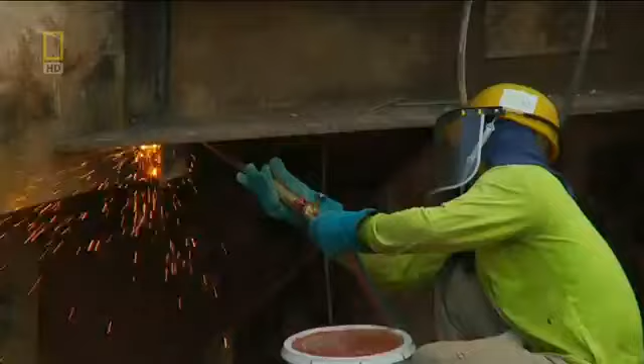Singapore's Marina Bay Sands is one of the world's most complicated construction projects. Engineers have to build not one, but three skyscrapers that will shoulder a sky park as big as an aircraft carrier. Worst case scenario, we get stuck.

They have to devise ingenious solutions to assemble a 60-meter tall museum of impractical dimensions, install giant artworks, and erect seemingly floating pavilions for shopping and entertainment. If engineers succeed, they will create a virtual city unto itself.

Singapore, the Southeast Asian country, is smaller than New York City. The lack of space forces it to build its largest leisure and entertainment hub to date on a small tract of reclaimed waterfront land.

The Marina Bay Sands. It's not one megastructure, but many. Serious challenges lie in the array of buildings that form the unique complex. Three 55-story hotel towers slope at such great angles, they're in danger of buckling under their own weight.

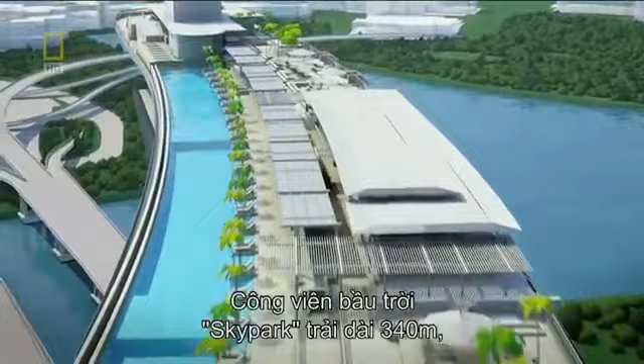An even bigger problem is the hotel's roof. A 340-meter sky park spans its length, containing gardens, outdoor pools, and the world's largest cantilevered observation deck. But how do you build something as big as an aircraft carrier, 200 meters in the air?

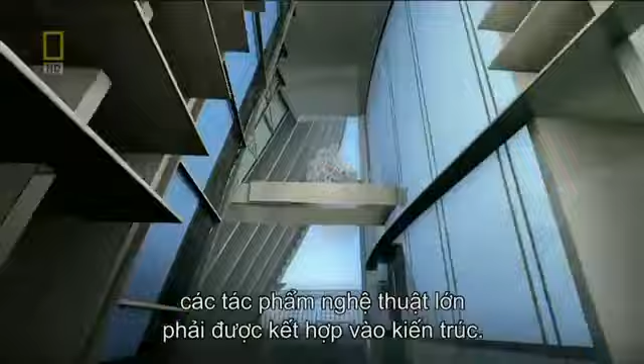In the hotel's atrium, mammoth works of art have to be somehow incorporated into the architecture. Its challenging centerpiece, a 15-ton mass of steel by a renegade artist from Britain.

A 60-meter tall art science museum is designed for maximum visual impact. It will be to Singapore what the Opera House is to Sydney. Only one problem: it seems too impractical to construct.

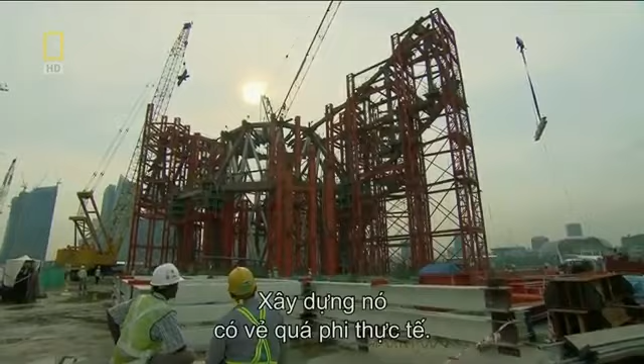And a set of dramatic glass-encased pavilions, while themselves posing little challenge, have to be built in water.

The man behind the Marina Bay project understands the risks, but he believes that anything short of astounding will fail. Sheldon Adelson, one of the world's richest men and CEO of Las Vegas Sands Corporation.

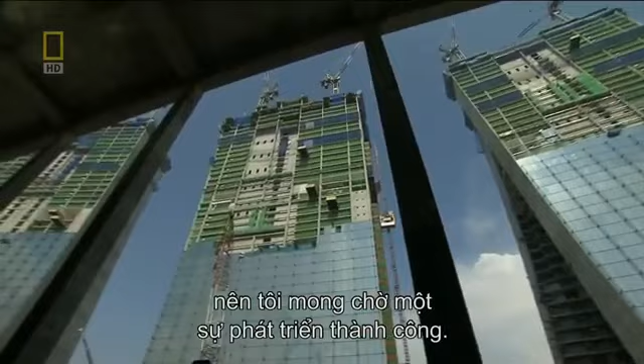What we hope to accomplish is to change the face of Singapore tourism. So we expect a very successful development. That is by far the largest and most expensive single project we've ever undertaken. It'll cost about 5 to 5.5 billion US dollars. It's a lot of money. Now, I know $1 billion doesn't buy what it used to, but by any measurement, it's a lot of money today.

Adelson believes his huge investment is safe in the hands of Moshe Safdie, a world-renowned architect. Safdie is recognized for his use of dramatic curves and geometric patterns. The Marina Bay complex will be his largest and most difficult project yet.

I think that architecture has to be timeless. Therefore, what it espouses, what it provides, needs to be something that has a long life. What's unique about Marina Bay is all the pieces coming together. You can't think about it as individual buildings. You've got to think about it as a piece of city. It's much more a symphony than it is a sonata.

On the ground, engineers are more concerned about the reality of building Safdie's vision. This is the North Retail section area. 30-year veteran John Downs is in charge of overseeing the entire project. The design is very, very diverse, and each component of the project is totally different from the others.

For a project of this size, you'd expect with the planning, with the design, with the construction, you'd be expecting somewhere between 6 to 7 years. Here is basically a 3-year turnaround.

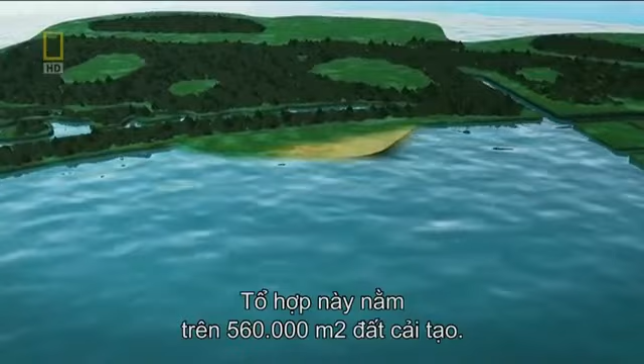The complex sits on 560,000 square meters of reclaimed land, part of a decade-long plan to revamp Marina Bay, a former saltwater estuary that's now a freshwater reservoir.

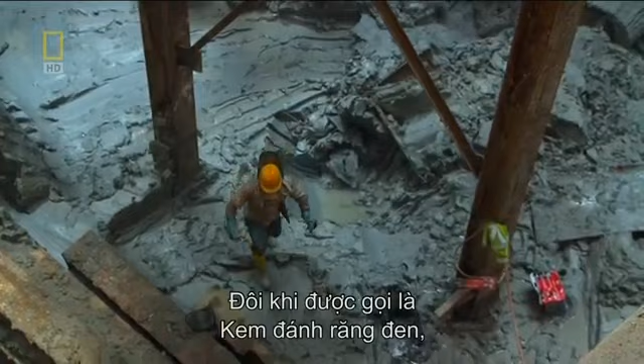Beneath the reclaimed land, which is essentially a seabed, is a dangerous layer of marine clay. Sometimes called black toothpaste, marine clay has very poor structural properties. If not given complete respect, the unstable marine clay is potentially fatal.

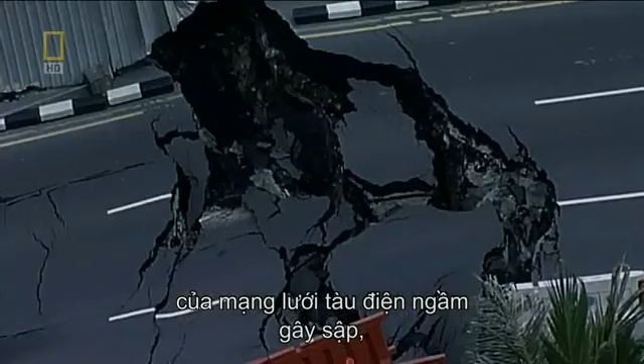In 2004, Singaporeans discovered the lethal consequences firsthand. A routine excavation in an underground tunnel for the mass rapid transit network causes a collapse, creating a gaping hole in the Nicoll Highway, killing 4 workers.

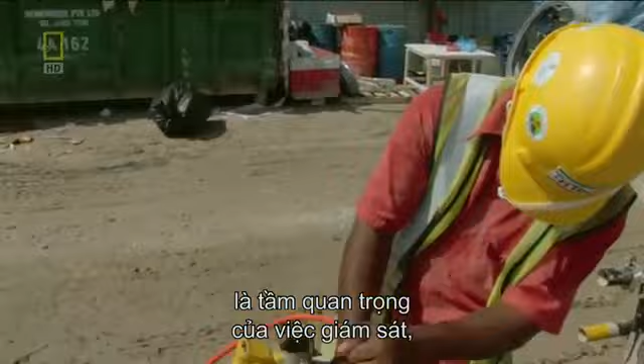The ground conditions in which they were building the Nicoll Highway were not dissimilar to those in which we are encountering here. They had also soft clay, they had similar depths of excavation between 20 and 37 meters. One of the big things that was learnt in the Nicoll Highway collapse was the importance of monitoring movements and the control of quality as the construction proceeds.

Marine clay is an old foe of engineer Mike Barton. He's defeated it in the past by understanding how it behaves. The big problem with marine clay is that it is so soft that when you dig out the inside, the walls will move and potentially collapse and allow all the surrounding water in the bay into the excavation.

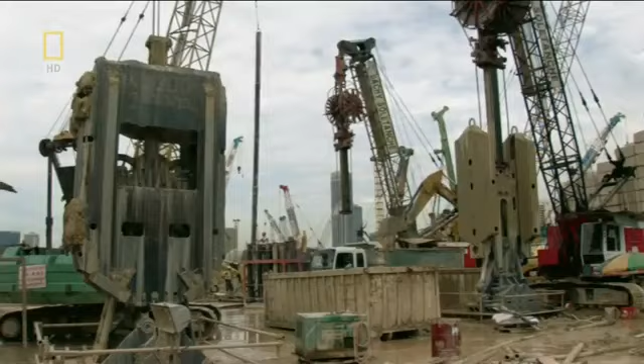So, before work can begin, the unstable building site needs major fortification.

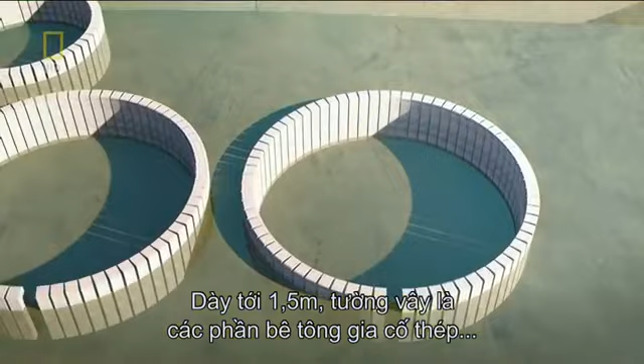To combat marine clay, engineers decide to build giant concrete walls to create stabilizing perimeters for the larger buildings, known as diaphragm walls. Up to 1.5 meters thick, diaphragm walls are steel-reinforced concrete sections, pounded 50 meters into the ground. They form watertight enclosures for men and machines to work round the clock.

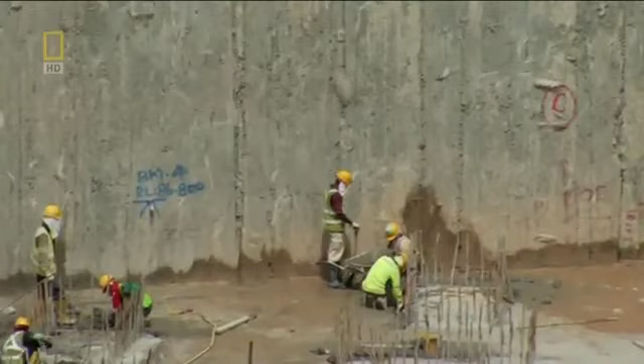In just 1 year, over 4,000 meters of diaphragm walls help produce a rock-solid foundation. The diaphragm walls were constructed in a formation we called a peanut formation, which is 2 circles joined together, and a donut formation, which is circular. They're able to withstand very, very large forces from the marine clay without any movement. They encapsulate an area bigger than a football pitch that enables us to excavate very quickly and to build structure up very quickly.

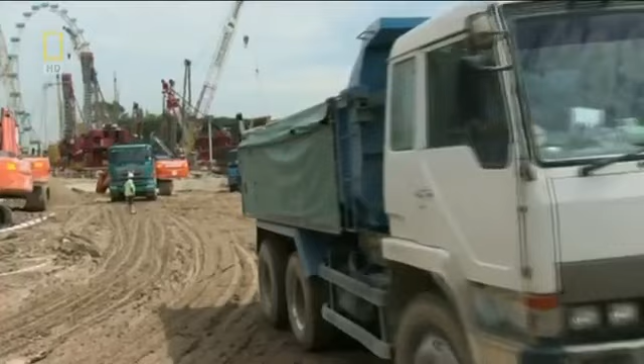Securing the footprint of the Marina Bay project has already taken a year out of John Downes' schedule. He now faces the difficult task of erecting the resort's many buildings in a space of just 2 years. Just managing the whole logistics of that, including the construction methodology, is very, very challenging for us.

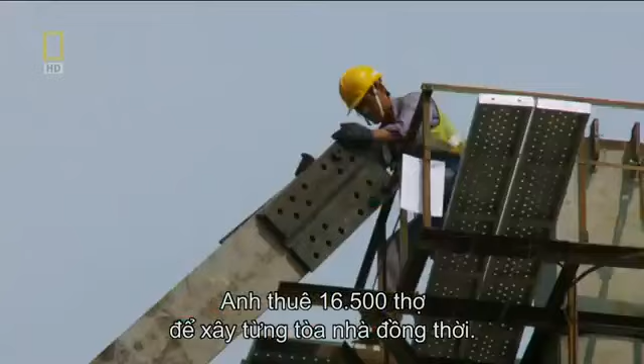To meet his tight deadline, Downes chooses the most direct solution. He hires 16,500 workers to construct every single building simultaneously. It's like leading a small army, so organizational excellence is key.

We're just on the edge of Singapore in the CBD here. Rather than lose the contractors and the workforce to go off-site, we built our own 3-story project office. We have all of our contractors, our subcontractors here. We house our resident site staff. We have our project management team, our construction management team, our design management team, and the logistics here.

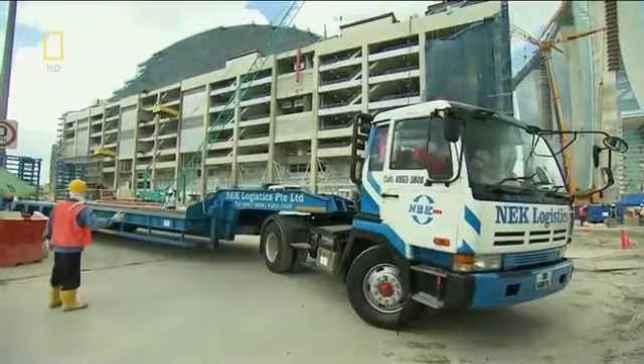The tight schedule also creates problems at the hotel towers, where engineers are already struggling with a congested site. The important thing to do is to make sure that they come in and deliver the goods straight away and then get out again. We don't want too many vehicles on site at the same time.

To speed up construction and alleviate traffic congestion, engineers turn to a method that's proven itself countless times in the field: precast concrete.

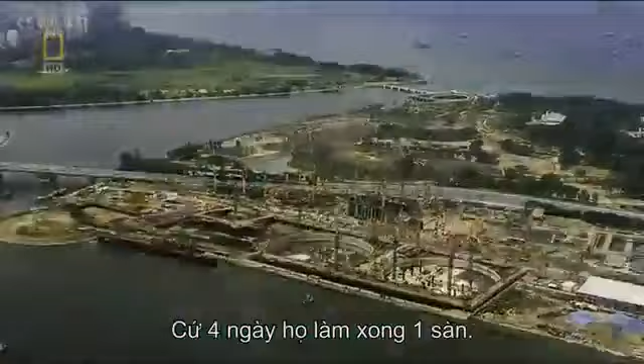Hotel walls are made on site in the thousands. And workers laying the floors are so proficient, they produce 1 floor per 4-day cycle. It's an impressive display for a conventional solution.

But the structure they're attempting is anything but conventional. The key challenge of building the hotel towers is its unusual design. Unlike other skyscrapers, part of the towers slope at incredible inclines. Like a set of collapsing dominoes, the towers could buckle under their own weight if a practical building solution is not found.

It's a major concern for engineer Craig Glover. I've been in the industry for 25 years, done a wide range of projects in many different countries, but nothing compares to this whatsoever. There was nothing we could take reference from across the street on the next high-rise or across town. This is a new frontier.

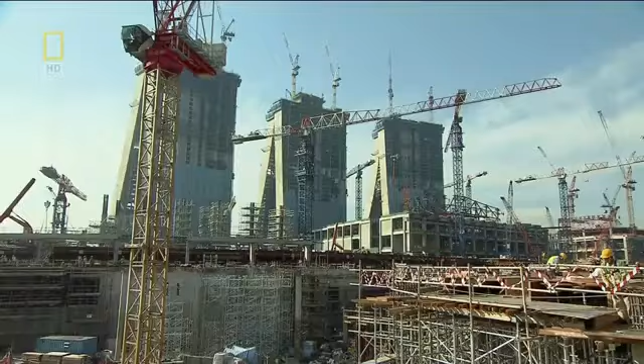Costing a staggering $5.5 billion to build, the Marina Bay Sands could be one of the world's most expensive mistakes if engineers can't solve the tower's problematic structure.

Engineer V.C. Cheong leads the design team, and their solution comes out of left field. If you look at the configuration, it's not a straight tower. It's with a sloping leg. So all this sloping leg actually is, inducing a very huge external force onto the structure. We can't build it without any support, so we actually formulate a solution to use bridge technology to prop up the sloping edge.

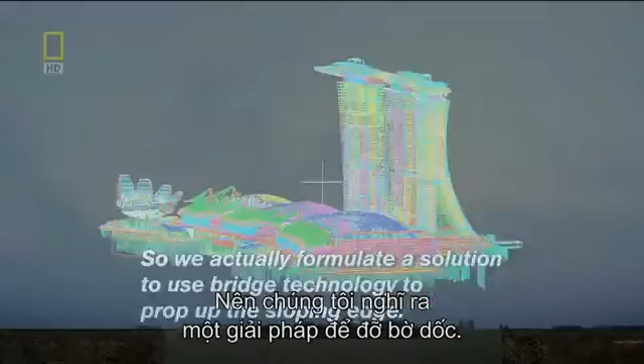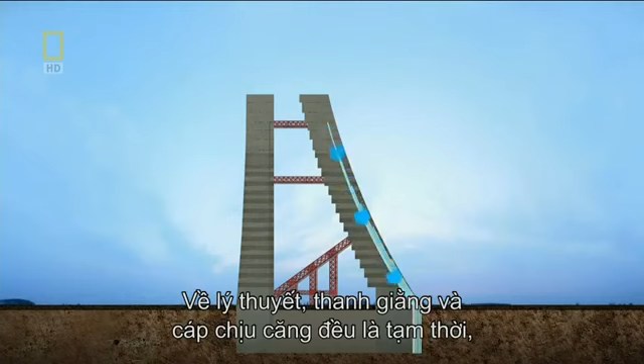Using a technique they've never employed before, engineers build large temporary struts made of strong structural steel. They prop up the sloping towers as they rise. Like a suspension bridge, high tensile steel tendons, also known as tension cables, give an added layer of support inside the walls. In theory, both the struts and the tension cables are temporary and will be removed once giant link trusses connect the towers at the 23rd floor.

The sheer weight in concrete is enough to topple the towers at level 8 if the engineer's calculations are wrong. To reduce the chances of failure, Glover and his team make a radical decision.

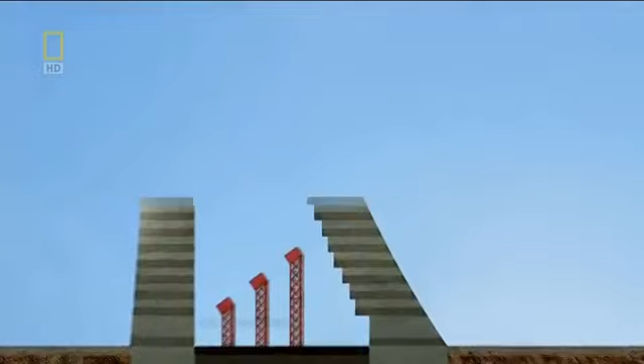Instead of removing the temporary tension cables in the tower walls, they make them permanent supports. I feel good it's in there because it's added strength, it's added support. We have a tendon network here of high-strength steel, and what we do is bundle these up so they form a cord with multiple strands inside this conduit.

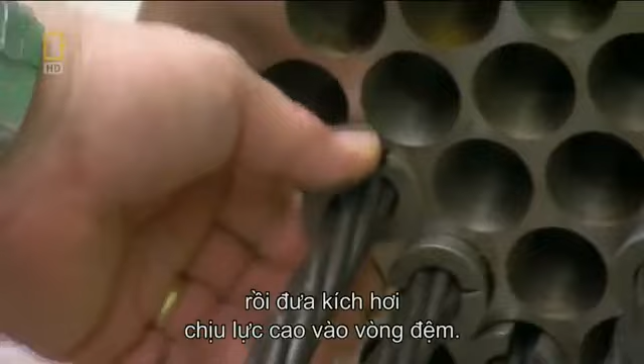We place this conduit inside the walls prior to casting the concrete. So once the concrete is cast, we anchor one end into the concrete. We then put a very high-strength pneumatic jack onto the collar and one by one pull these strands through and tension them up. What that does is basically pull the building back and hold it in place.

If these cables were to suddenly break, or if they weren't in place, we wouldn't be able to control the self-weight as we build more and more of the building up. Despite the team's quick thinking, the true test of their engineering decisions will only happen once the main support struts are removed and the massive link trusses installed. Link trusses are huge reinforced steel brackets that bind the towers at the 23rd floor.

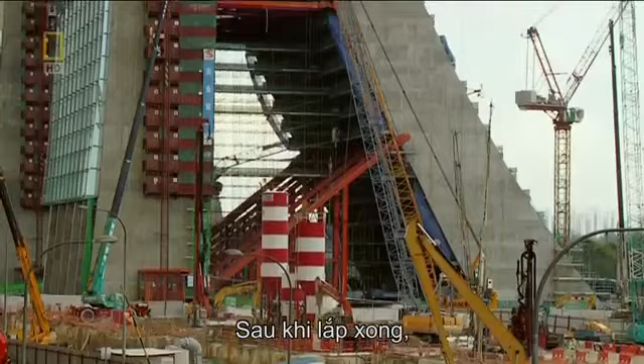Once their installation is complete, they transfer the sloping tower's weight completely away from its temporary struts. Once we're satisfied that we don't have any stability issues, we can bring the large hydraulic cranes in and, member by member, start to dismantle the struts. We've got a lot of time pressure, so we've just got to make sure these things keep moving.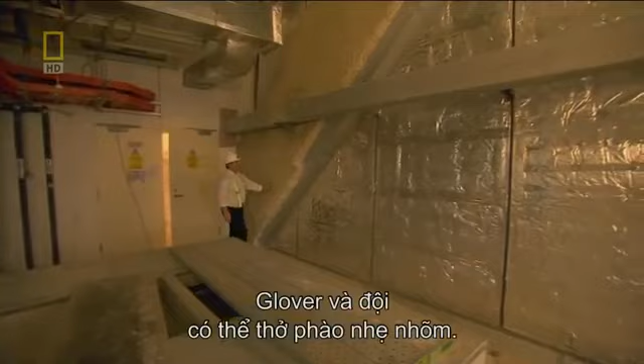As the last pieces of support struts leave the site, Glover and his team can finally breathe a sigh of relief. The link trusses are holding the building load. So far, so good.

Not all the structures have ended up according to plan. The 60-meter-high Art Science Museum is facing a major design overhaul. Planned as a venue for blockbuster exhibitions on the arts and sciences, its bowl-shaped roof doubles as a 3,000-seat amphitheater.

Unfortunately for engineers eager to start construction, architect Moshe Safdie isn't happy with its current shape. Somebody looked at them and said it looks like a bunch of bananas. In fact, Mr. Adelson said it looks like a bunch of bananas. I said, well, if they look like a bunch of bananas, we're not there yet.

It's terrible news for Safdie's design team, especially its principal, Gene Dyer. There are times that Moshe will come in with an idea. We think it's quite exciting. We'll pursue the idea for weeks or even months. He'll come back and say, I want to change the idea. And we've already bought into the idea, so it's a bit frustrating.

To rework the unique geometry and dimensions of the Art Science Museum, Dyer and his team turned to advanced 3D modeling programs. It not only makes navigating the museum's complex geometric patterns easier, it shortens the process to a matter of days. The model is dynamic and can be moved by just changing one or two elements. Moshe could experiment, making rapid judgments in a very short period about which way he wanted to take the project. This is a process that was impossible to do 10 years ago. Without the computer, this would take years and years and years.

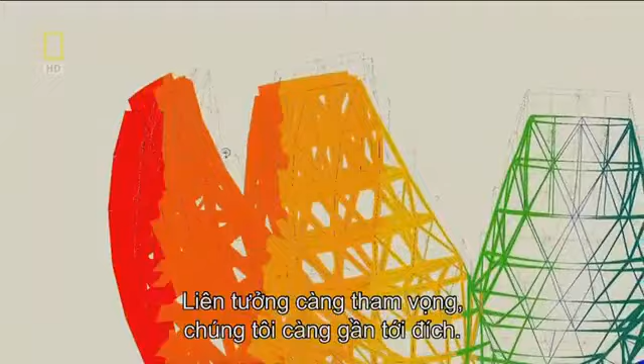After months of refining the design, Safdie is finally happy with the result. The mathematical precision that we gave them made them even more beautiful. It led some people to say, well, hand of welcome. Others said, is that a lotus? And the more ambiguous the associations, the closer I thought we were getting to our target, because I think the least exciting buildings are those which have overt symbolic associations.

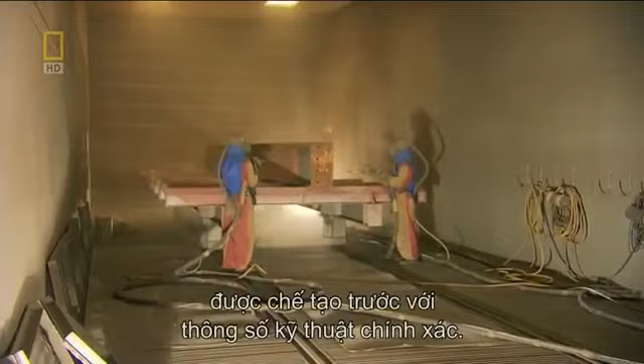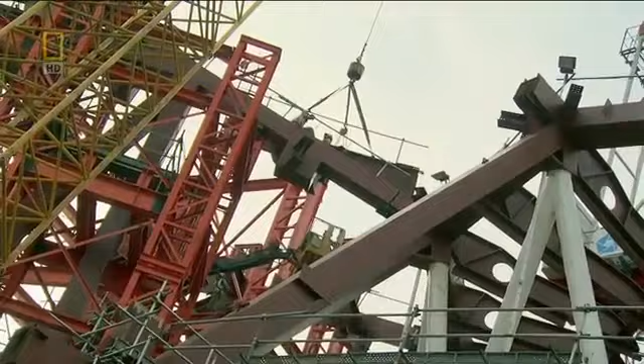Armed with the new design, engineers begin work on the museum's 60-meter-high superstructure. A staggering 5,600 steel elements, weighing some 5,200 tons, are prefabricated to exact specifications. They are then trucked onto site and assembled. It's like putting together a giant jigsaw puzzle. Each element has to be installed with pinpoint accuracy. If it's even a few millimeters off, engineers will have to start from scratch.

Engineers of the massive atrium at the base of the towers are facing an equally tough construction process. Safdie has come up with a challenging design. He wants to inject art into the atrium's architecture, so that visitors will feel like they're walking through a grand Gothic cathedral.

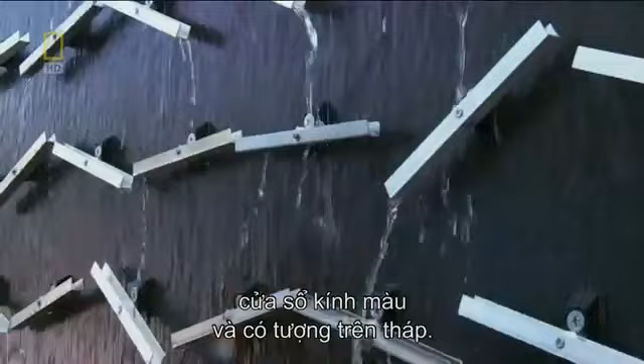In medieval times, if you think of a Gothic cathedral, there's the architecture, there's the stained glass windows, there's the sculptures on the pinnacles. You cannot draw a line and say art and architecture. Art and architecture are one, they're singular experiences. And I think what we try to do here is come back to this integrative mode.

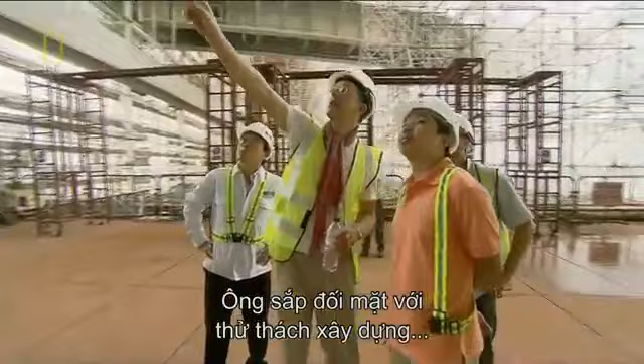To create the centerpiece of his vision for the atrium, Safdie commissions renowned British sculptor Antony Gormley. Famous for his unusual approach to art, Gormley is the brains behind the Angel of the North sculpture in northern England. What he's about to attempt is proving to be more of a construction challenge than an artistic one.

A cloud-like sculpture some 40 meters long, made up of 15 tons of high-grade stainless steel, hung 12 stories above the atrium. The Angel of the North is, in a way, making a very traditional public sculpture because it's isolated in space at the edge of a valley. You can see it for miles and miles. It's very much about occupying space. This is about activating space.

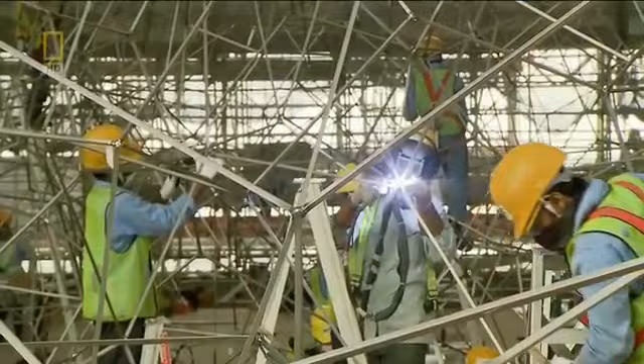But just as they're about to begin construction, a bombshell drops. September 2008: a global financial crisis wreaks havoc on markets. The flow of the hundreds of millions of dollars that keep the Marina Bay project going every month suddenly stops.

For engineer Matthew Pryor, it's a massive blow. I feel devastated. I mean, it couldn't be worse. Probably the worst day of my life professionally. There's no more money coming through, so unless we put some funding in place or there's something, we're going to have to shut the jobs down. It's a tough decision to be made, and we don't know what we're going to do just at this point in time.

With the future of the multi-billion-dollar project plunged into doubt, all eyes turn to the man behind it, Sheldon Adelson. The next move of one of the world's richest men will determine the fate of the mega construction site.

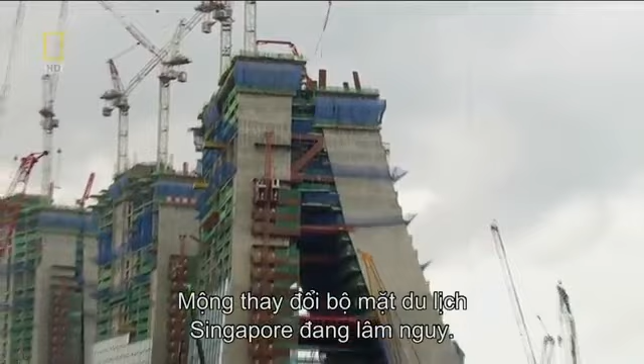The 2008 global financial meltdown is a haunting echo of the 1990s Asian crisis. Back then, progress on Shanghai's World Financial Center came to a complete halt for 5 years. For Adelson, that's simply not an option for the high-profile Marina Bay resort. His vision of changing the face of Singapore tourism is at stake, and so are billions of dollars of investment from his Las Vegas Sands Corporation.

He prefers finding a stopgap solution to weather the storm. Throughout history, there has never been a trend that went straight up, nor a trend that went straight down. So it goes up and down. It's only a matter of time when things will recover.

In a bold move, Adelson pledges his vast personal wealth to the completion of the project, effectively ending any speculation of failure. There's a massive sense of relief in the company. Everyone was pleasantly surprised how quickly we got through this, and the fact we could hold it together and get it going again. So euphoria is probably the best way to describe it.

With the crisis averted, construction on the 3 57-story hotel towers, the casino, theaters and convention center resumes at pace.

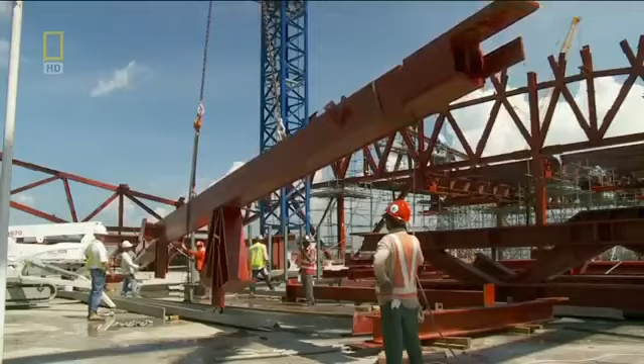Everywhere you turn, steel is being installed. It's vital reinforcement for every concrete structure on the 15.5-hectare site.

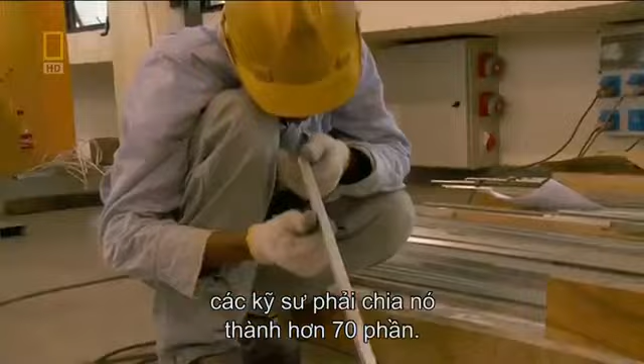For one project at the tower's atrium, steel is more than just reinforcement. To construct the 15-ton Drift sculpture by British artist Antony Gormley, engineers had to first laboriously prefabricate it into over 70 segments. The segments are then welded into 8 slices that will ultimately form the sculpture.

It's a tricky operation, but engineers are able to complete it swiftly due to a system of codes and numbers that enable them to quickly identify what goes where. Once all 8 slices of Drift are fully assembled, it's lifted up into position by a temporary lifting frame. A massive box truss on the atrium ceiling then takes over the load. In theory, the box truss will support the weight of the lifting frame as it's being lowered down.

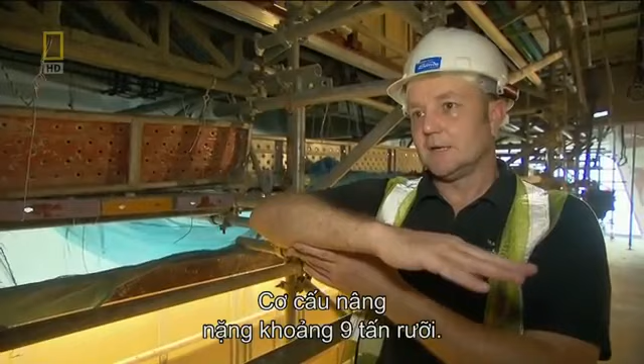It will be a heart-stopping moment, especially for engineer Graham Stevenson. The lifting frame is about 9.5 tons, so when it picks up and gets some momentum, there's a potential that it just wants to flick over and rotate through its full 90 degrees, and we won't have it under control.

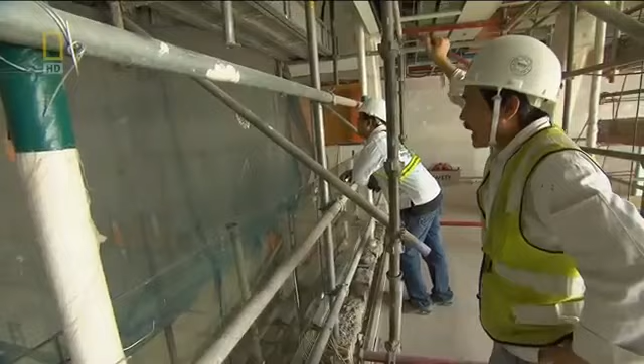Stevenson's solution: 4 powerful automated hoisting drums located at the 4 corners of the frame. They allow workers to control the strength and speed of the operation with high tensile steel cables. A spotter at the top determines the pace of the procedure and marshals the team.

The entire operation is estimated to take up to 10 hours to complete. As soon as the frame is in motion, there's no turning back.

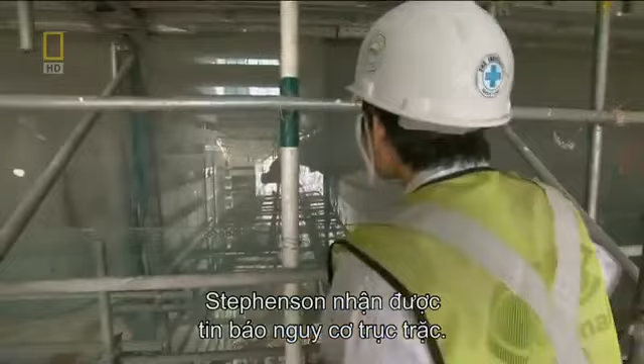Midway through the lift, Stevenson receives reports of a potential problem. "22nd story, number 7, temporary cable, scaffolding touching the cable." "Why have you got the temporary cable touching the transom?" "Yeah, but is it just the end of a tube?" "Yeah." "So you can just cut the tube?" "Yeah."

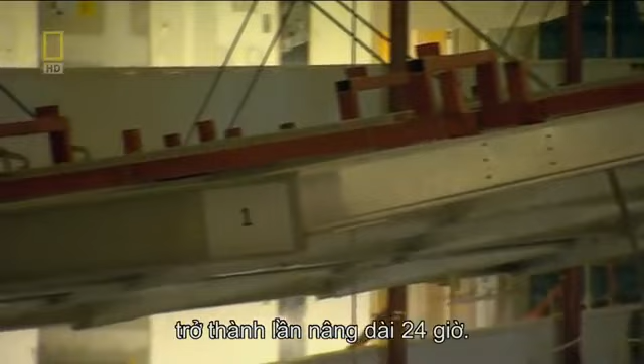Problem solved. But what was previously an estimated 10-hour procedure now turns out to be a 24-hour marathon lift. At 6 a.m. the following morning, they complete the job. "Absolutely fantastic. The Gormley is now finally in its final position, so really an end of a long and exhausting day, and big thanks to everybody, but it's finally done."

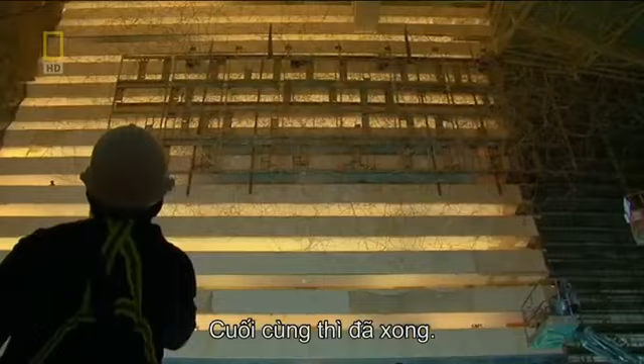While Drift settles into its new home at the hotel atrium, elsewhere attention is focused on one of the project's key features: the Crystal Pavilions. The 2 glass-encased buildings by the promenade are set to be the resort's premier shopping and entertainment complexes.

But before engineers can make them a reality, they have to secure their footprint, and already a major obstacle threatens to sink their objective. The Crystal Pavilions are situated within the confines of Marina Bay, so to found it, engineers have to find a way to build in 6 meters of water.

The responsibility of tackling the problem falls on the shoulders of engineer Kurt Vella. "I'm from Sydney. The underlying foundation in Sydney is sandstone, it's rock. All you need to do is just dust off the surface and you can build skyscrapers on it. Here it's very different - all the structures have to be heavily founded."

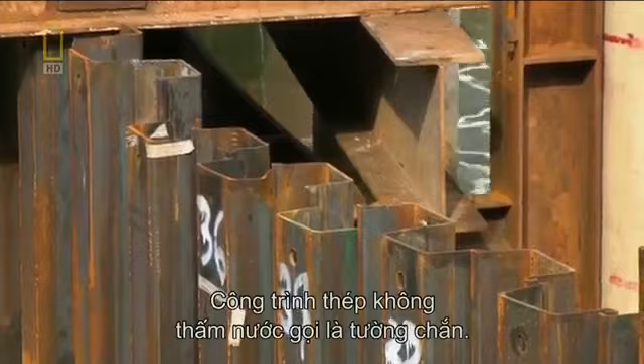To keep water out of the construction site, only one solution seems viable for Vella and his team: a waterproof steel structure called a cofferdam. This temporary formation surrounds the worksite with a circle of steel sheet piles, creating an impenetrable shield that locks out the water, keeping the workers safe within. For the job, they rope in a 12-ton vibro hammer. It punches the sheet piles deep into the earth, making the cofferdam rock solid and resistant to movement.

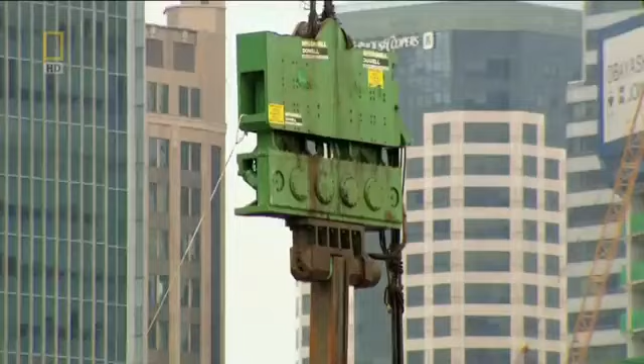With the cofferdam secured, engineers deploy powerful diesel pumps and run them 24 hours a day, ejecting any water that remains within the walls.

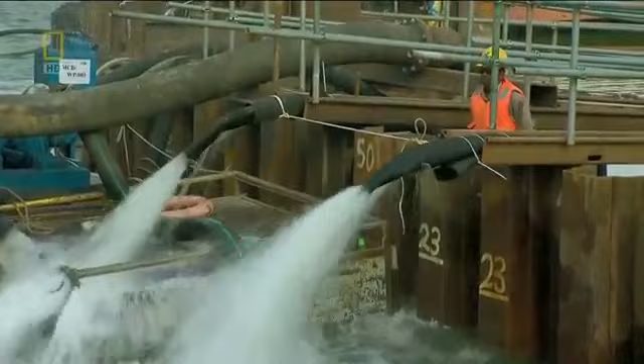This last step comes with inherent dangers. The force of the water outside creates what engineers call hydrostatic pressure. In theory, it's powerful enough to force water through any gaps in the cofferdam. It's something that Vella prays will not happen.

There's a bit of hesitancy and concern because we've got to build this building in the middle of Marina Bay. Everybody can see what we're doing, so if it leaks, it's a problem. If it fails, if it moves, if it collapses, it'll be an absolute catastrophe.

After a day of pumping, Vella's worst fear comes true. Parts of the cofferdam are leaking.

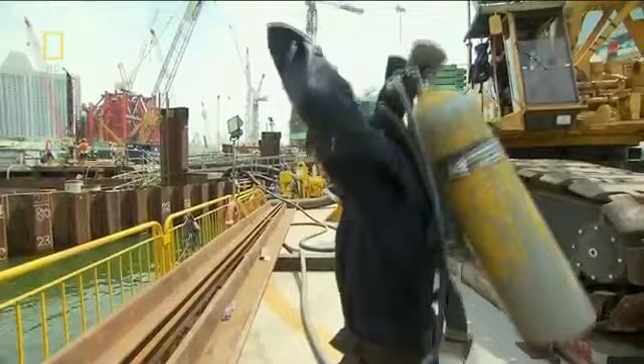To rectify the problem, Vella orders a team of 8 divers into the water on 10-hour shifts. Their mission? Find out where the water is being forced in and plug them shut with epoxy resin.

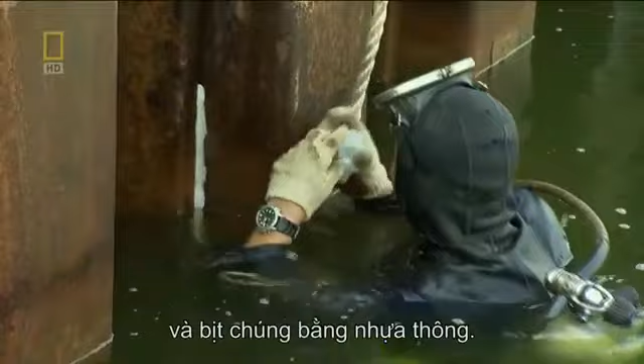Anson Lee is an 8-year diving veteran. The toughest part of our job is the environment. The visibility is poor here. It's totally zero, I cannot see anything below. I solve that by feeling the suction and then feeling out the thing.

You have to overcome all the fear that you can't see under the water, but okay, I feel proud to be one of this team to build this thing.

After 2 weeks of hard work by divers and the pump crew, the job is finally complete.

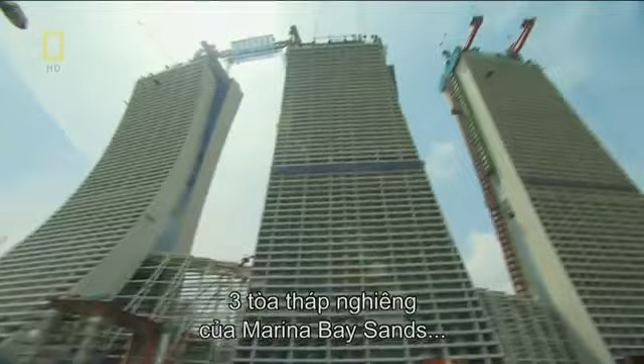After 2 years of battling the elements and overcoming difficult construction milestones, the 3 sloping towers of Marina Bay Sands can finally celebrate their topping out ceremony and move on to the next phase.

But a destructive force of nature threatens to throw a spanner in the works. With climate change predicted to affect the pattern of Southeast Asia's typhoons, Singapore may one day experience the destructive tropical storms plaguing its northern neighbors in the Philippines and Taiwan.

When that happens, typhoon-force winds could spell disaster for the hotel towers, especially the 340-meter Sky Park sitting on top of it. The force of the wind can make both buildings sway dangerously, causing irreparable damage to the structures.

The Sky Park, offering 360-degree views of Singapore. The visionary design will have enough surface area to park 4.5 Airbus A380s.

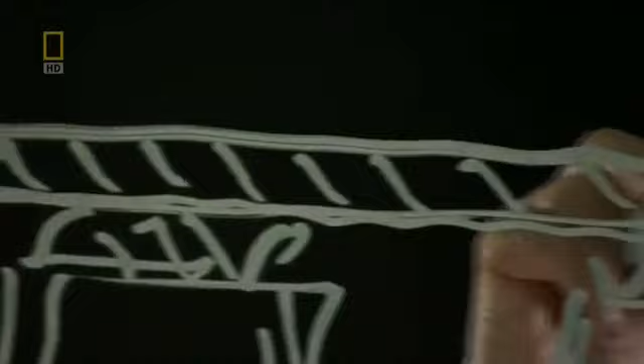But when architect Moshe Safdie first mooted it, it stemmed from a purely functional need. Luxury hotels, as we think of them, always have lots of open space around them, gardens, at least in the kind of tradition. But we didn't have much space left.

Safdie's revolutionary idea scores points for ingenuity, but it clearly isn't what nature intended. Typhoon-force winds threaten to rock the towers and its sky park, causing unimaginable damage.

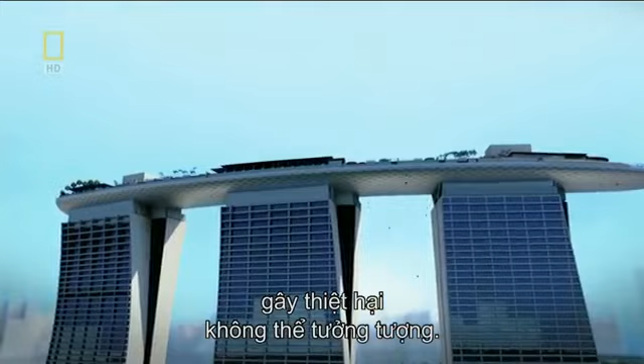If engineers are to make the building a reality, they'll need a rock-solid solution. Still got to do all this cladding. Engineer Tony McKee has little time to make things happen. At the moment, we're running a couple of weeks behind what we'd originally planned.

We're not entirely happy about it, but at the end of the day, we've got to do this safe and we've got to do it properly.

To fight the enemy, McKee knows he has to first understand the enemy. He hires leading US wind engineers CPP to carry out extensive testing on the towers and Sky Park. Their mission? Find out how Singapore's potential wind forces affect the buildings.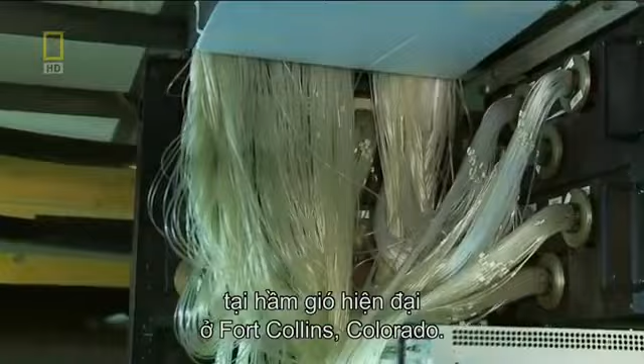Wind engineer Roy Denoon oversees the process at their state-of-the-art wind tunnel in Fort Collins, Colorado. The thing that makes this really special is the fact that we have this Sky Park running across the top, linking all the towers together.

So whereas normally with a normal tower, we'd measure the loads on the tower in isolation, with this one, what we're needing to do is measure the loads on all three of the towers at exactly the same time. That way we can know how the towers are going to move relative to each other, so we can make sure that they're not going to put excessive strains or movements into the Sky Park.

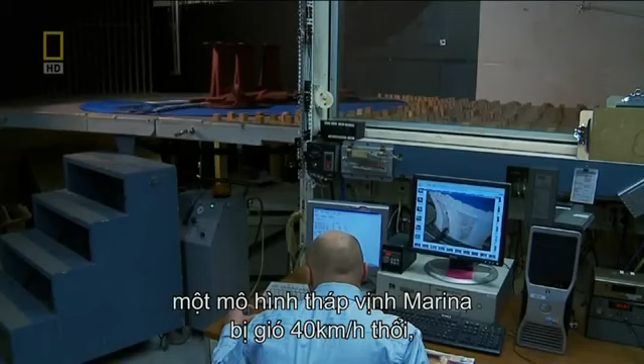During the tests, a scale model of the Marina Bay towers is blasted with 40km/h winds to simulate faster typhoon winds in reality. Over 1,000 pressure measuring instruments inside the model register how the winds affect the buildings. At the end of the tests, engineers confirm that the three towers can deform by some 200 millimeters during the fiercest storm.

Engineers quickly figure out a solution: movement joints. Inspired by bridge engineering philosophy, movement joints are essentially gaps located between the concrete towers. The huge gaps allow for movements of up to 250 millimeters.

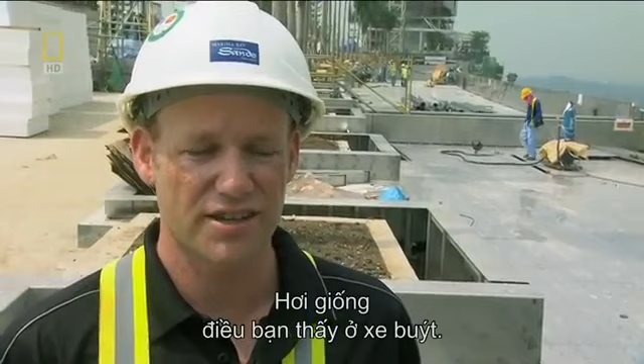Aluminium and stainless steel plates act as sliding components. They can move back and forward over each other, a little bit like you'd see in a flexible bus, where you have that articulation happening in the middle. It's a similar concept to that. To accommodate the differing movements of the three towers, engineers install multi-directional steel bearings below the Sky Park.

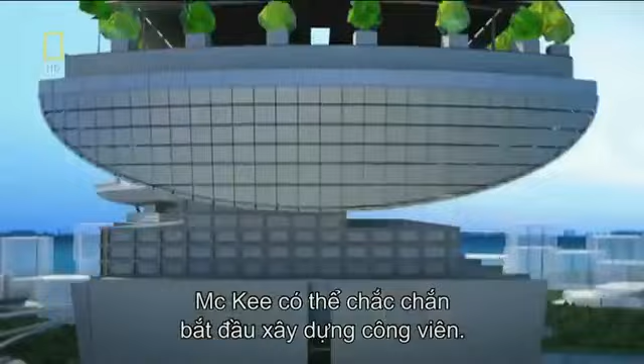Armed with the final results, McKee can now safely begin construction of the Sky Park. Consisting of some 10,000 tons of steel, the Sky Park is as big as an aircraft carrier. The most practical way for engineers to construct it is to break it into 14 segments on the ground before assembling it at the top of the towers.

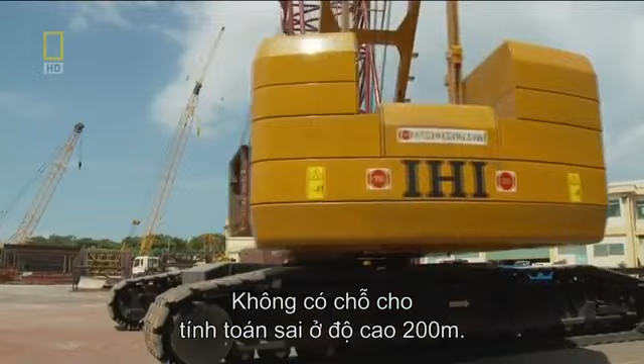There's no room for miscalculation at 200 meters in the air. Each segment is carefully prefabricated and tested by steel specialists Yongnam, and then trucked to the site independently.

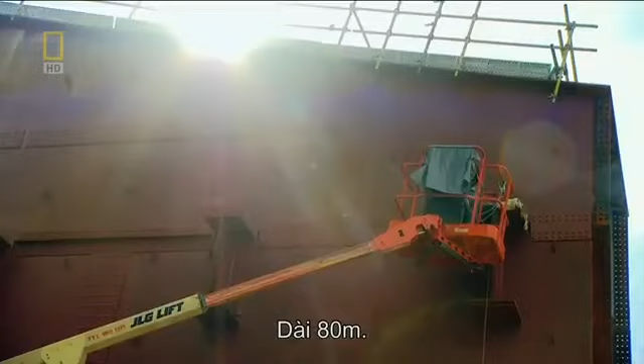From the very beginning, McKee and his team anticipate that their biggest challenge will be lifting the two largest segments of the Sky Park, the box girders. Measuring 80 meters long, their combined weight is a staggering 1,400 tons.

How do we feel? A little bit of apprehension. It's a significant lift that hasn't been done before. If something goes wrong, it could be really significant for us.

To reduce risks, McKee turns once again to proven bridge building technology. In a process known as strand jacking, giant temporary lifting gantries made of strong structural steel will use powerful hydraulic jacks to lift the box girders up to the top of the towers before sliding them into place. It will be the longest and largest lift of its kind in the world, and McKee needs the best in the business. He puts a pioneer in the field in charge.

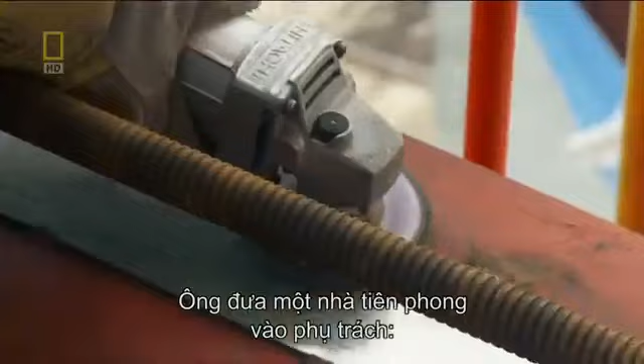Swiss-French company VSL. Engineer Eddie King and his team have successfully raised bridges, stadium roofs, and even Ferris wheels.

The toughest work of my work is you have to plan everything very precisely, because everything has to be set up in millimeters. So we have to lift up and slide it in and position it in 5 or 10 millimeter accuracies. If we don't do it properly or don't do it safely, the biggest hazard is the thing can fall down to the ground.

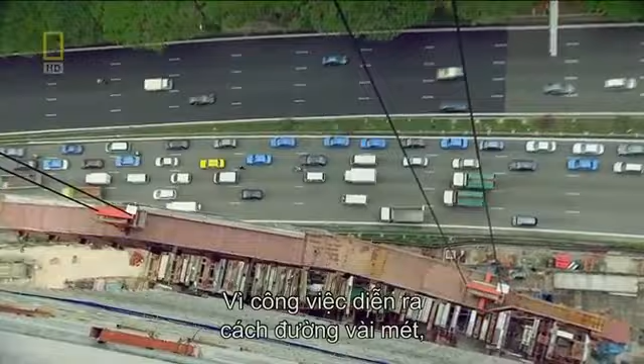Other factors further complicate the lifting process. Due to an increasingly tight schedule, the team is forced to conduct the lift during Singapore's annual monsoon season. It's almost impossible to predict when a tropical storm will hit. When it does, the accompanying lightning strikes can endanger lives. And because the whole operation takes place meters from a jam-packed highway, curious onlookers will be able to see any mistakes the engineers make. It's a potential public relations nightmare.

Okay, now I stop, yeah?

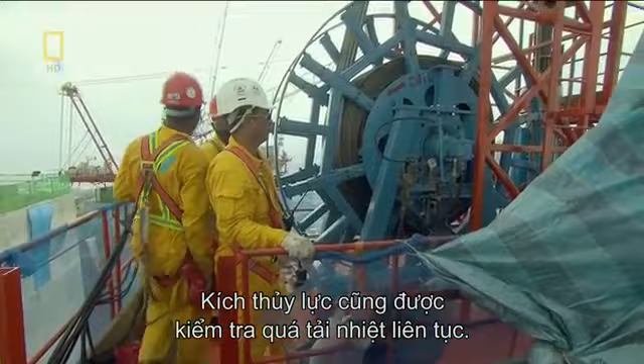During an estimated 16-hour lift, the box girders will move at a cautious 14 meters per hour. Eddie King and his team constantly check their weather gauges for any incoming storms. The hydraulic jacks are also inspected regularly for overheating. No one wants the operation to stall in mid-air.

Despite the team's best efforts, Mother Nature catches them by surprise. Okay guys, rain is coming. It's better we stop here.

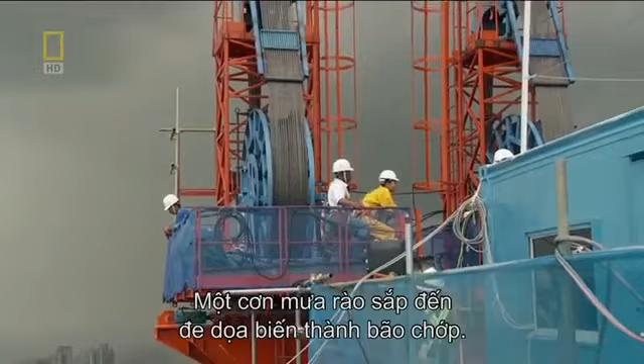An approaching downpour threatens to grow into a lightning storm. We are at 200 meters above and surrounding buildings are quite far away, so there's a chance of lightning striking a high point like this. So we got to stop and wait until the weather gets better before we continue our lift.

After a tense 3 hours, the lightning threat passes, and the operation cranks back to life. By the time the box girders slide into position, it's past midnight. Everything went quite smooth today, so we hope tomorrow we can do the same.

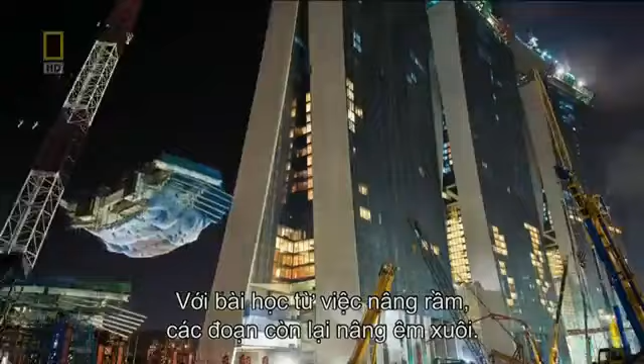With the lessons learned from the box girder lift, the rest of the segments go up smoothly. As the final piece rises into place, Singapore is already marveling at the team effort behind one of the world's most ambitious building projects.

In just 3 years, engineers overcame seemingly impossible construction challenges, defeated marine clay, engineered ingenious design solutions, and survived the most debilitating financial crisis since the 1930s. As the finishing touches are put on the resort, the stage is set for an opening party, Singapore style.

Those involved reflect on the project that has already far surpassed their expectations. It's a bit kind of overwhelming, you know. I'm in the process of disconnecting the umbilical cords - not easy for an architect.

This type of project probably only comes around every 25 years or so. So it's been a lot of hard work, extremely challenging. I really can't imagine, I couldn't list the number of challenges we've overcome along the way to get to today. Everybody is saying this is kind of a miracle, you know, never seen anything like it. And it's rewarding, it's nice.